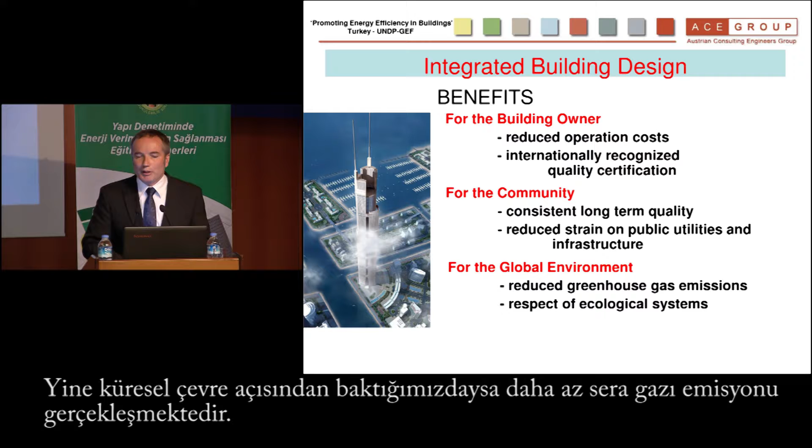The first thing we will talk about is integrated building design and the benefits of this procedure. The benefit for the building owner is reduced operating costs over the life cycle of the building. For the community, what's important is reduced strain on the utilities - if you have a neighborhood of energy efficient buildings, the utility doesn't need to be built up to the extent it would for a community with high energy demand. And naturally, the benefit for the global environment is reduced greenhouse gas emissions.

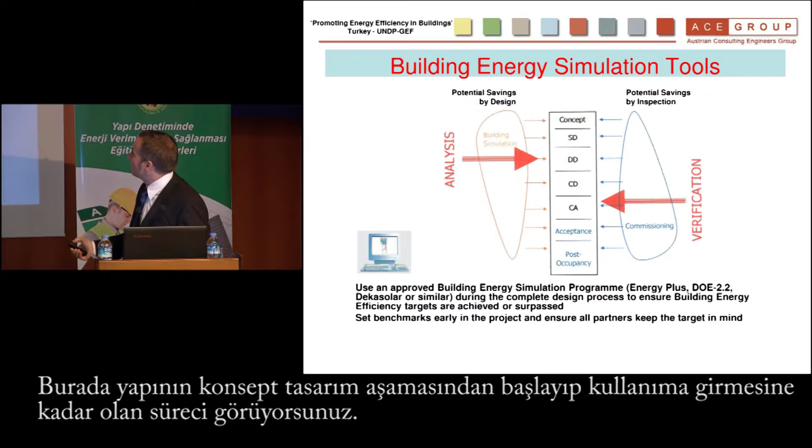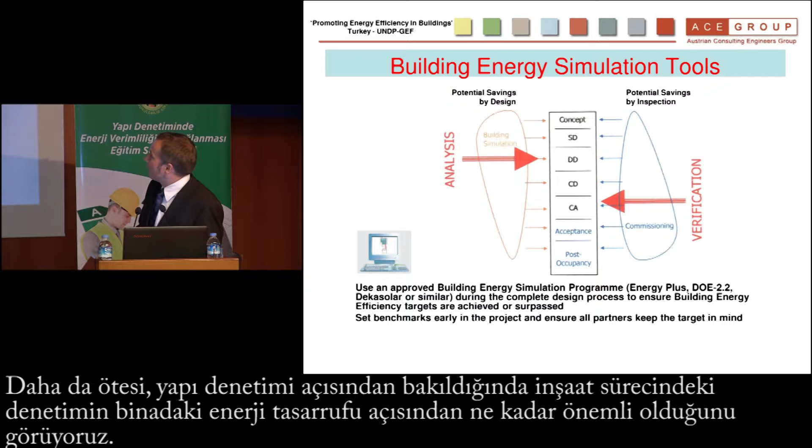We're going to talk about simulation tools in order to achieve the integrated building design. This is the design process from concept to occupancy. What's important to see is the great potential for energy efficiency savings in the early stages of building design, and further on, how important inspections are during the construction phase in terms of building up the potential energy savings. The important part here is integration - having all participants in the building process working together to achieve a target.

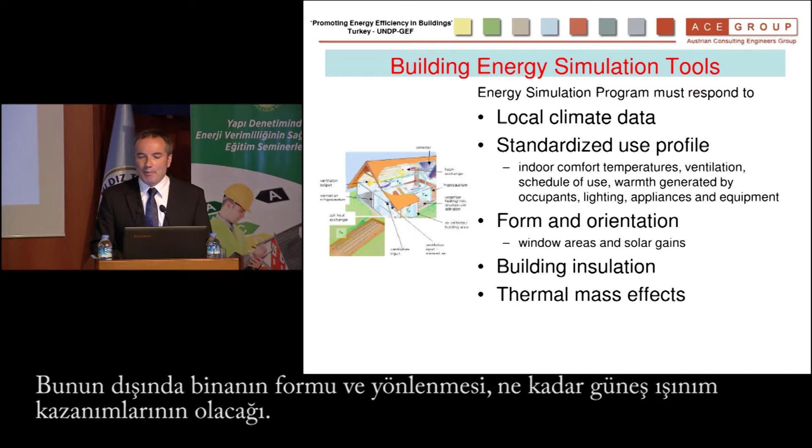Important for the simulation program is that it incorporates all the local climate data and a standardized use profile. For residential buildings, for example, the indoor comfort temperature is around 20 degrees, the amount of ventilation necessary, the schedule of use, the warmth generated by equipment and occupants - this all has to be taken into consideration. Also the form and orientation of the building, what solar radiation gains are expected, and the building insulation, but as important, the thermal mass effects - the storage of warmth or cooling in the building material inside the thermal insulation.

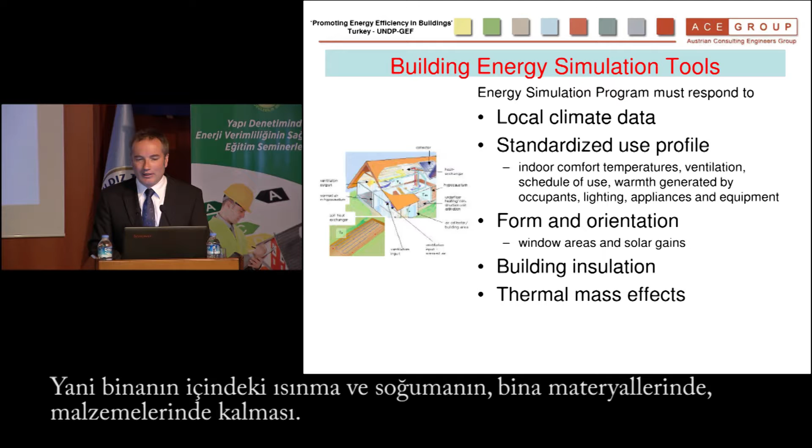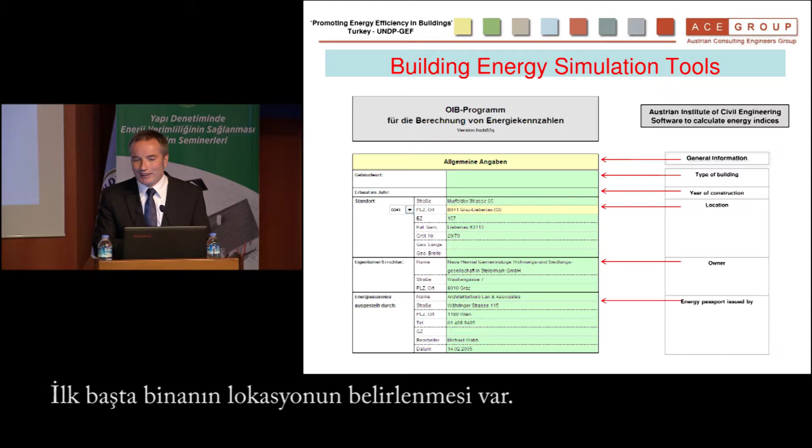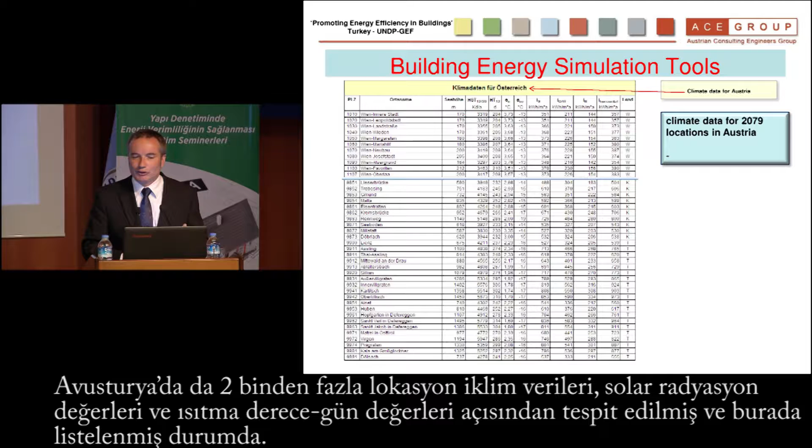I'm going to show you an example of the Austrian form for calculating the energy performance of buildings. This was developed by the Austrian Institute of Civil Engineering and made available free to all building professionals over the internet. Important on the cover is determining the location of the building - we've got over 2,000 locations in Austria documented in terms of climate data, solar radiation, and heating degree days.

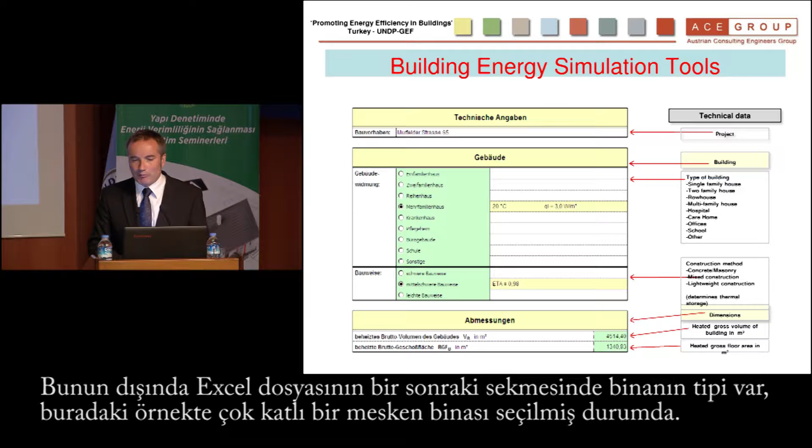This climate data feeds into the Excel program. On the next sheet, you talk about the type of building - in this particular case, we're looking at a multifamily residential building. Then we talk about the type of construction, whether it's light construction or whether the building materials are concrete and masonry, which can be used to build up the thermal mass of the building. At the bottom you see the brutto volume of the building, the heated volume of the building, and the heated floor area of the building.

This is the calculation for the heated volume and the heated floor area. What's important in the calculation is that each of the exterior surfaces of the building volume - basically this is the heated building volume of this particular project - and further on, each of these surfaces will be described in terms of the thermal quality of that exterior surface. So we talk about the building volume and the external envelope.

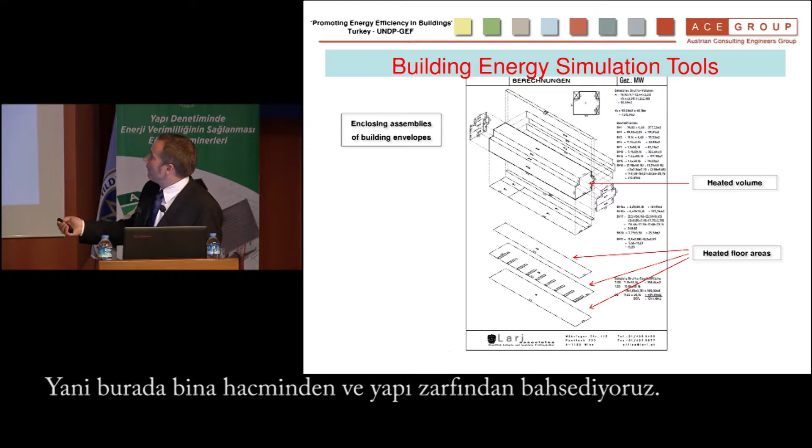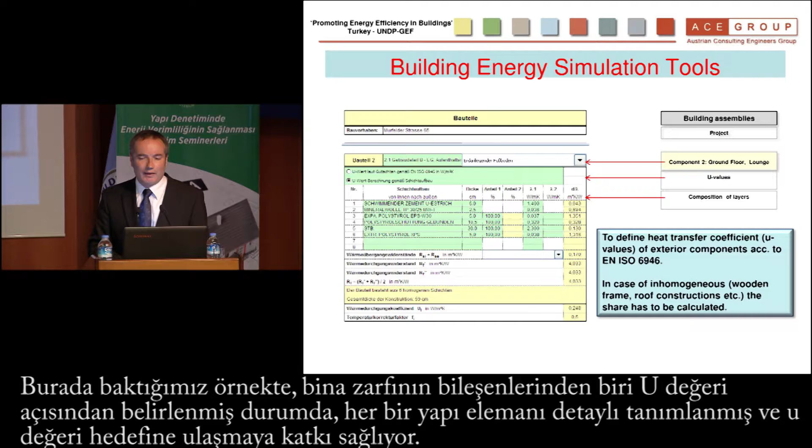Okay, in this particular case, we're describing the first one of the compositions of the building envelope in terms of the U value, and each element in the construction is described and contributes towards the U value. Then we talk about the area of each of these pieces of the building envelope, which will in the end describe the complete thermal envelope of the building.

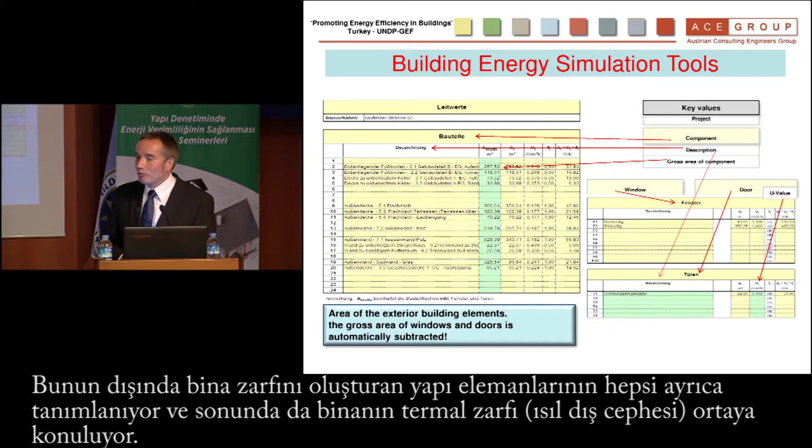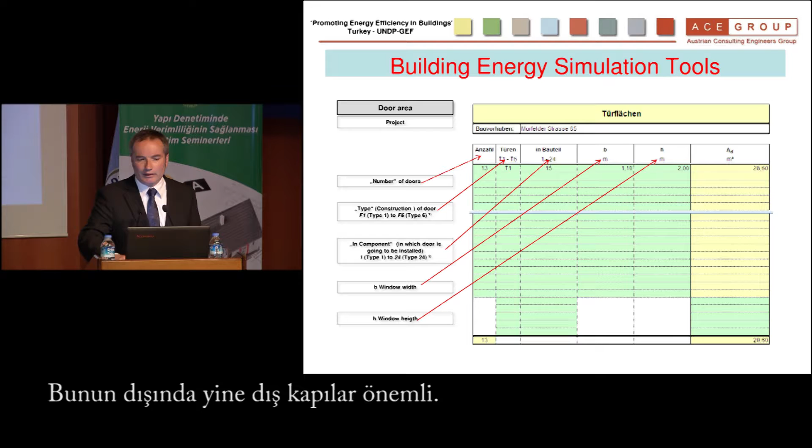We talk about the windows and the U values of the windows. You have the option here of either presenting a certificate for the complete window or describing the glazing, the frames, and the thermal bridge of the thermal frame. Then you describe the window areas, and what's important here is the size of the window, but also the orientation of the window, if it's facing south, and whether or not it has external shading devices attached to it. We have the same for exterior doors, basically the U value of exterior doors and sizes.

Okay, and then we talk about the thermal bridges. Basically, the form allows you to either calculate the thermal coefficient of the thermal bridges, or to take an assigned variable based on the European Commission documentation. The same is true of the ventilation, and here you're given the choice whether to describe manual ventilation or mechanical ventilation.

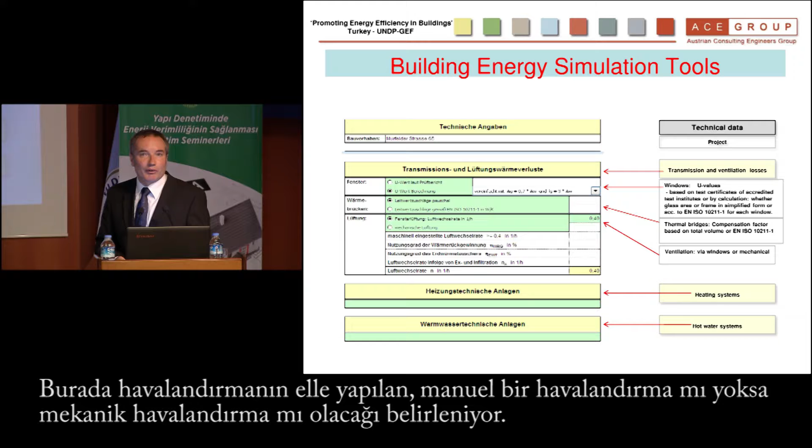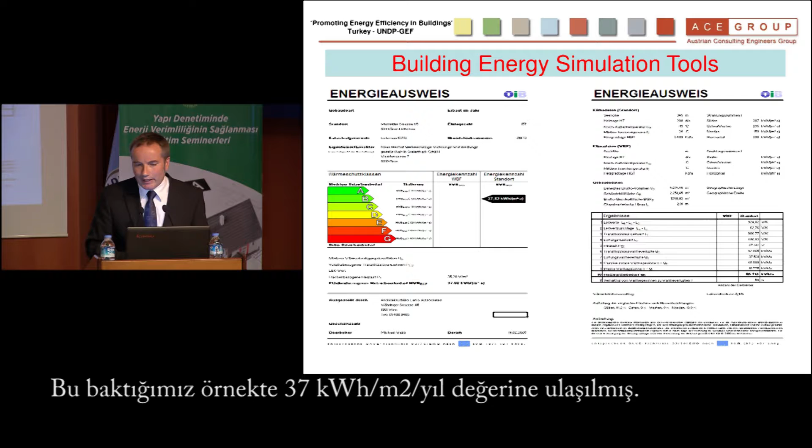Okay, and based on all of this information inputted into the program, you come up with the energy certificate of the building. In the case of Austria, it's concentrated on the heat, yearly heat necessity, the heat demand of the building. In this particular case, we've got 37 kilowatt hours per meter squared per year.

We use this program, as I say, this program was made available to all building consultants over the internet, and we use this program to experiment with the building form, with the building, with the composition of the building shell, and we can compare the effect of adding additional insulation, adding improved windows, and also with the ventilation.

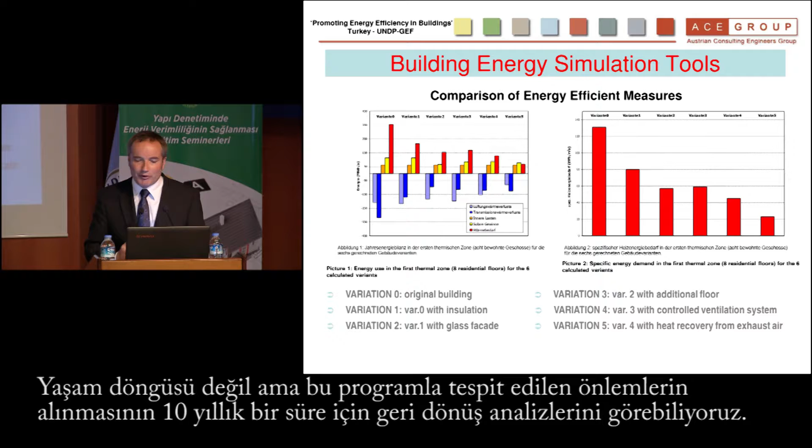And the idea is that you can determine the optimal energy efficiency measures using this program in order to have the most cost-effective building construction. That we're basically aiming at a 10-year payback period for the measures incorporated in the building.

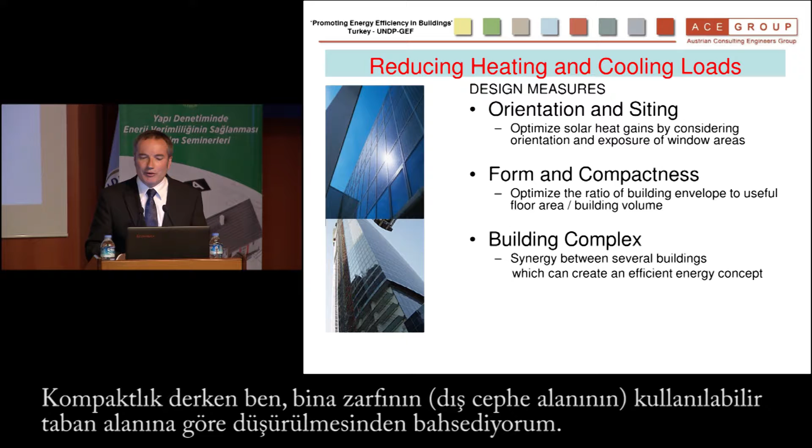Okay, and some of the concepts behind building energy efficiency buildings. Basically design measures that you can use at the beginning of the design process, choosing the proper orientation of siting and orientation of the building to optimize the solar gains, optimizing the form and compactness of the building. And by compactness, I mean that the ratio of building envelope is reduced in terms of comparison to the useful floor area of the building.

And finally, whether in a community you can place the buildings in such a manner with landscaping in order to create synergies between buildings and the landscape to reduce the energy demand of the building.

The other issues are creating inside the floor plan of the building comfort zones. That means creating heated and cooled zones within the building that are compact and have individual control. And again, in considering the design of the building, considering the location of these heated and cooled areas in terms of solar exposure, in order to reduce the heating and cooling load.

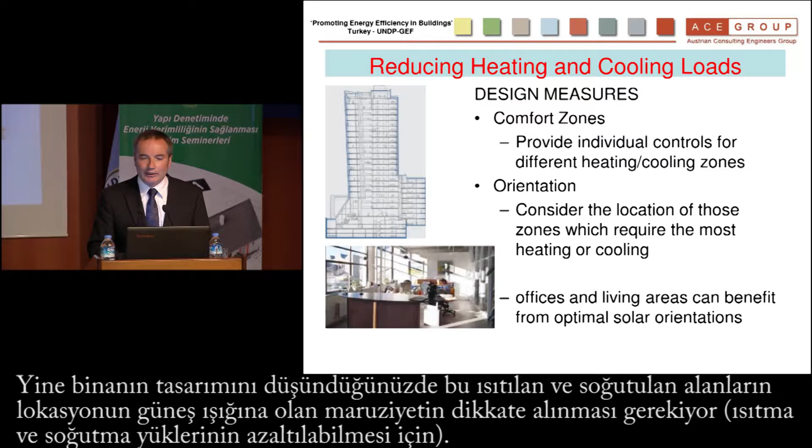And then coming back to the thermal mass of the building, considering that the building substance, the concrete, the masonry, inside the insulated layer can store heated and cooled air, heated and cooled temperatures, that you can store these up during the night, for example, and then they can be slowly released over the course of the day.

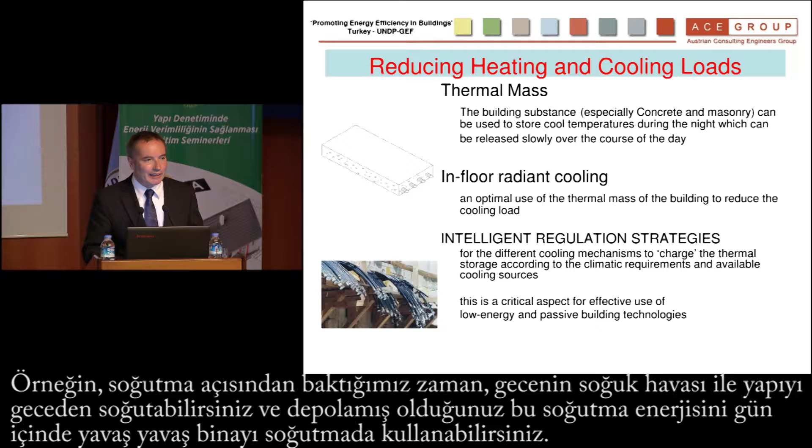In combination with this idea that you have intelligent regulation strategies, that means that you use, for example, cool air during the night in order to cool the structure of the building, that again can be released slowly over the course of the day.

Okay, again, one of the more effective means of saving energy is to use heat recovery. Basically, you need the ventilation for the building to create a healthy environment. And on top of that, from the expelled air we should extract either the cool or the heat in order to precondition the intake air.

And then the importance of inspection in the process again, that on-site inspections ensure the quality of the thermal insulation, that the building is airtight, that there are few thermal bridges or no thermal bridges, that the mechanical systems are constructed in accordance with the certification.

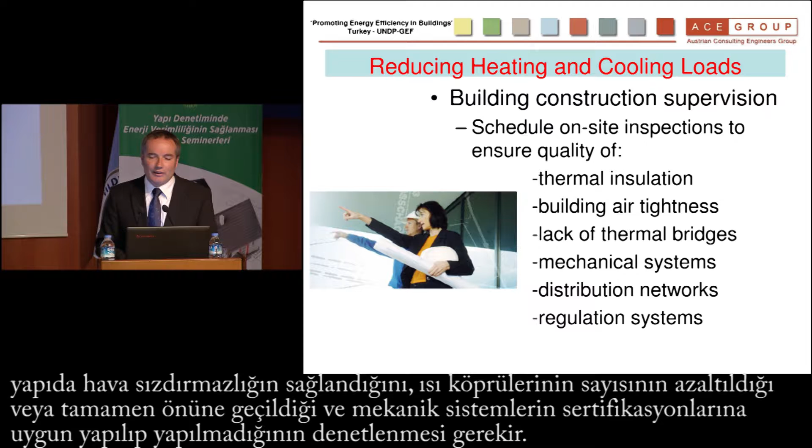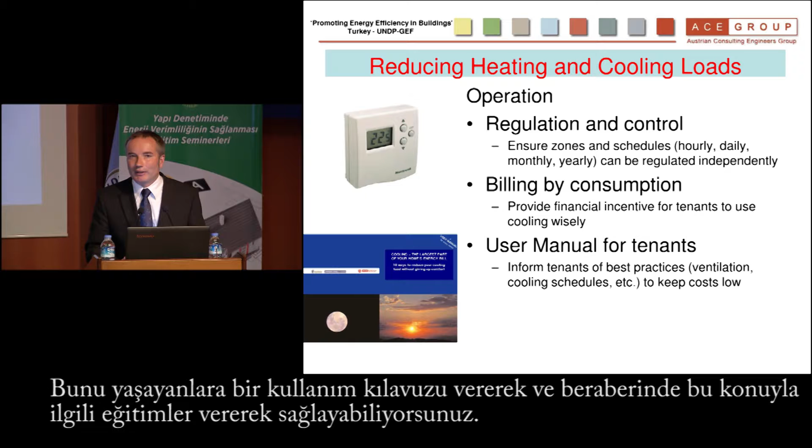During the operation, you have individual regulation and control within apartments and office spaces, so people can control the temperature. Combined with billing by consumption, tenants realize that excessive cooling in summer or excessive heating in winter impacts their heating bill. Another important aspect is informing tenants about how to use their building and best practices for energy efficiency, which we achieve through distributing user manuals and training for tenants.

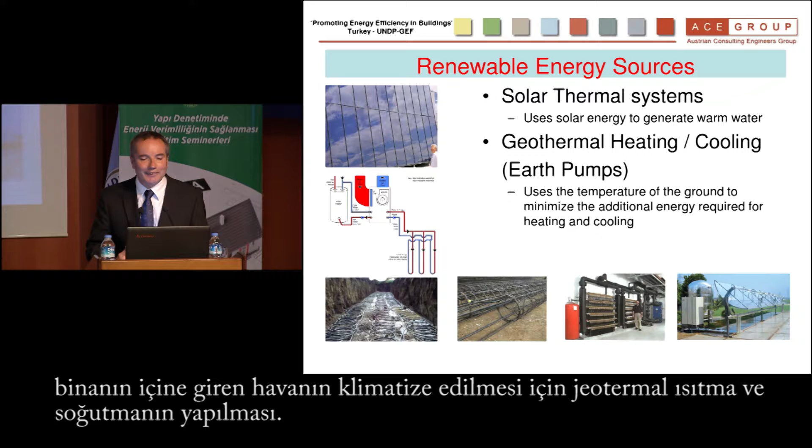Once the energy demand of the building is reduced, we can begin to look into the use of renewable energy sources to meet the demand. Some examples: using solar thermal systems to generate warm water and heating. Another popular system in Austria now is geothermal heating and cooling, using earth pumps to precondition the air coming into the building.

Other possibilities for electricity include using photovoltaic systems, with the possibility of integrating them into the architecture. In Vienna, there's a possibility that photovoltaic systems can feed back into the utility grid. You can use them independently or feed them back into the utility.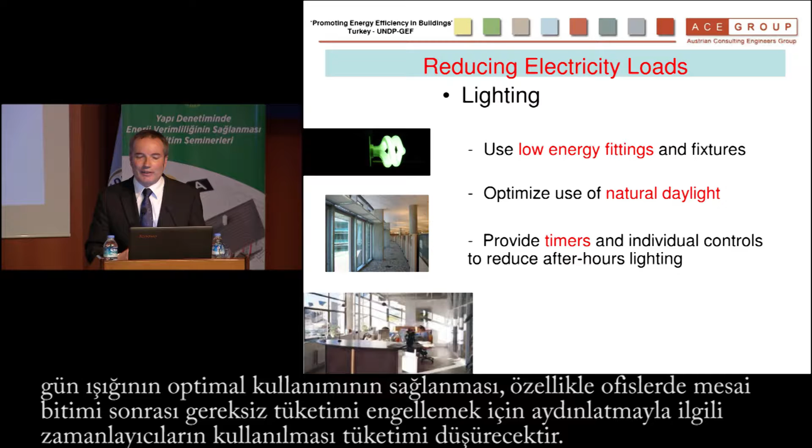Reducing the energy load also includes reducing electricity loads for the building, using energy efficient lighting and fixtures, optimizing the use of daylight inside the building, and using timers and individual controls to reduce after-hours lighting in offices and residential spaces.

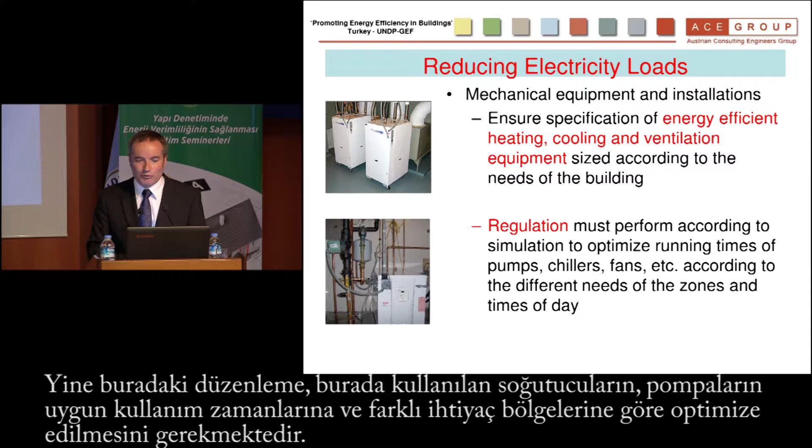The other important aspect is that if you have an energy efficient building shell, you can reduce the mechanical systems required for the building. And again, regulation, ensuring that heating and chillers are used according to the optimal times and needs of the zones, and choosing naturally energy efficient appliances inside the building.

The first consideration we spoke about this morning was using the local climate and considering it in the orientation of the building, especially considering solar exposure and how to prevent overheating in summer while using solar radiation in winter to help provide heating.

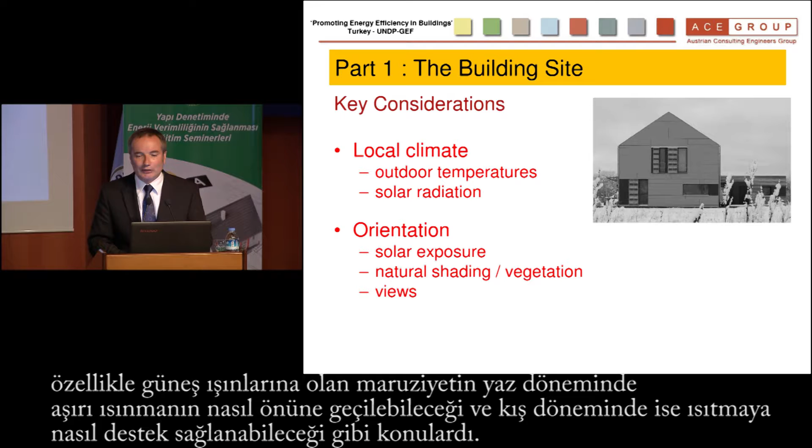We talk about the different climate zones in Europe. In the northern climate, you have high space heating demand and low solar radiation, especially during winter, so little opportunity to use solar radiation to heat the building. In Central Europe, where Austria is located, we have space heating demand especially during winter, little cooling demand, and enough solar radiation year-round to supplement heating with solar heat gains.

Finally, Southern Europe, where Istanbul is part of this, has high solar radiation year-round and needs cooling more than heating. This is the idea. This is an example of a building we built in Austria.

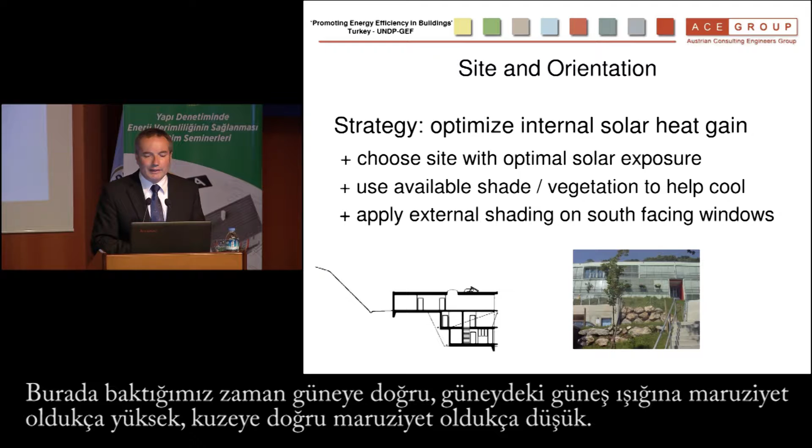Important to illustrate the siting of the building: it's a residential building built into the south-facing slope of a hill in Graz. This allows very much south exposure and a very reduced northern exposure for the building.

On the south side, as you can see in the photograph, we have full floor-to-ceiling glazing, but with an overhang on each floor of 60 centimeters to help shade the window area. You can see these lines here - this is the summer sun angle and this is the winter sun angle. So in summer, you don't have solar heat gains on the inside space; the window is kept in shadow. But in winter, solar radiation comes into the living space and helps heat the rooms.

Further, each of the windows in the apartments has the possibility of putting down blinds on the outside, solar blinds outside the window area. This further helps the occupants regulate the heat gain, especially during summer.

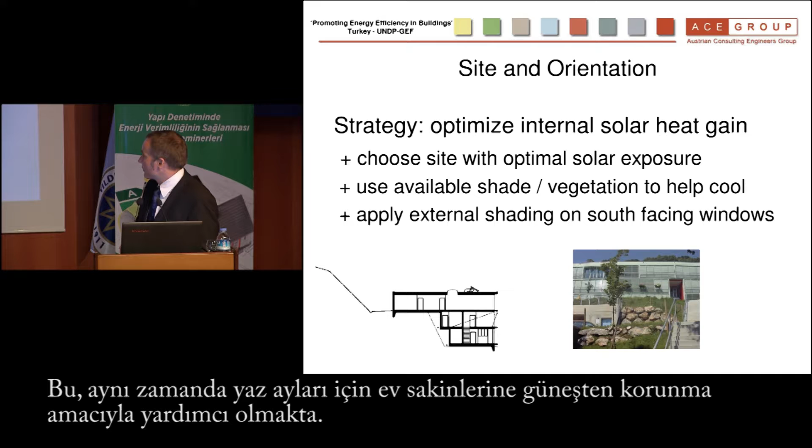A further concept is the depth of the building - a good illustration of the compact layout. We're looking at apartment units that are 18, 19 meters deep from south to north. We achieve this by having the important rooms that need lighting - the living room, the bedrooms - located on the outside, and the service core, bathrooms and kitchen, located on the inside where natural daylight isn't required.

Further, the living rooms where occupants spend their daytime hours are located towards the south side. These are the rooms which require the most conditioning, and the bedrooms are located on the back, north side. These can be cooler during the day.

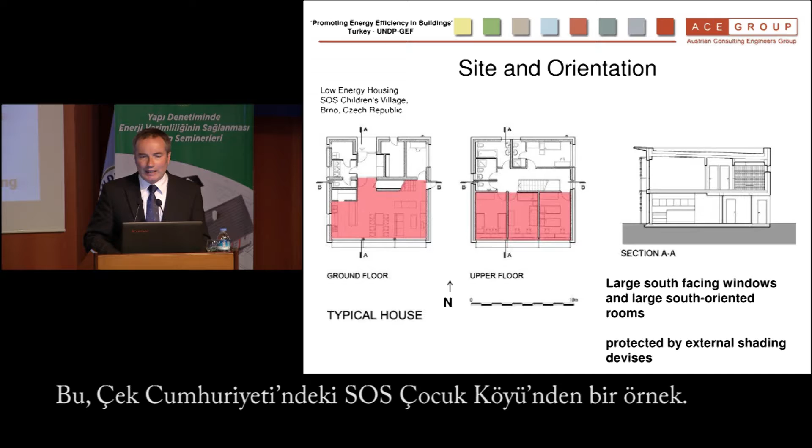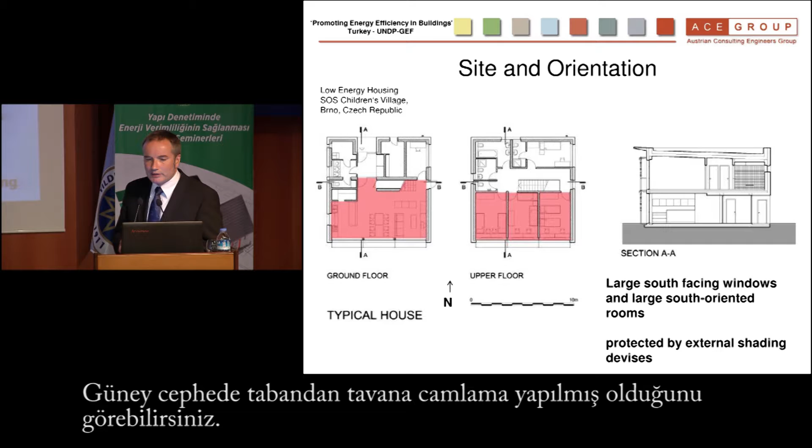This is a further example, the SOS Children's Village in the Czech Republic that we worked on. You can see on the south side we have floor-to-ceiling glazing. And on the north side we've put the service rooms, the bathrooms, the kitchen areas, the storage rooms.

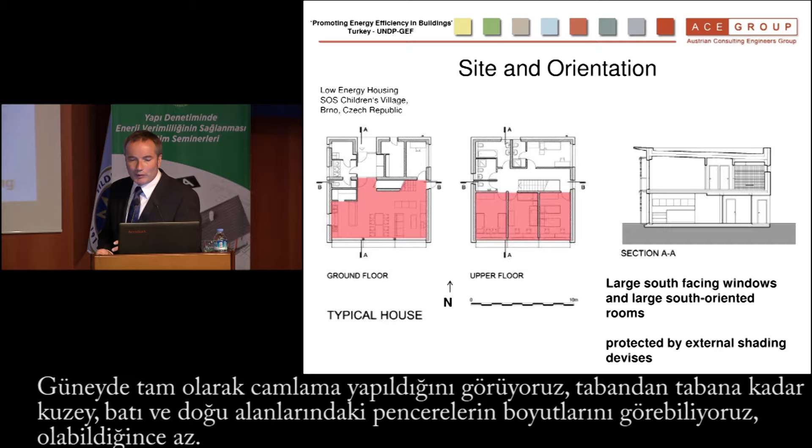And on the south side we have the main living room and bedrooms for the children. In the section you can see the floor-to-ceiling glazing on the south side, and on the north, east and west sides, as little window area as possible. We've provided this 60 centimeter balcony towards the south, and louvers to help provide shading, natural shading from the heat gains in the summer.

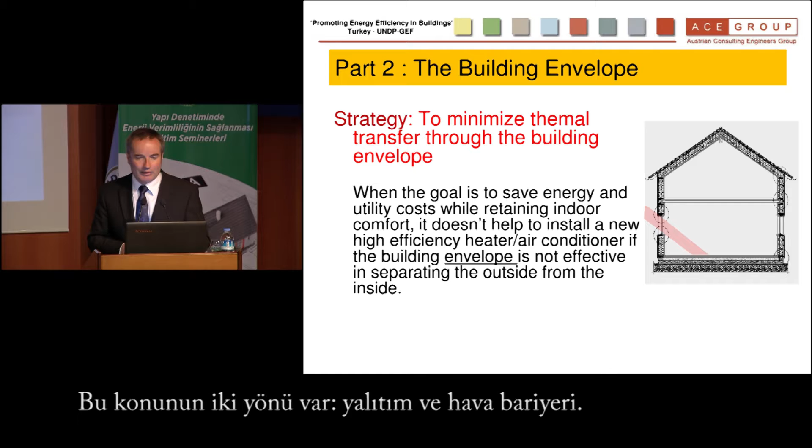Now I would like to speak about the building envelope. It has two aspects: the insulation and the air barrier. For the concept of the building, it's important to first attack the energy efficiency of the building before looking at the efficiency of the heating and air conditioning systems. It's important that the composition of the building itself is energy efficient before we begin applying energy efficient equipment. So in that respect, we talk about an efficient separation of the outdoor climate from the indoor climate.

That means no thermal movement and no air movement through the building shell. Again, the key considerations about optimizing the building shell: having a compact building form, trying to get the maximum usable floor area with the minimum of envelope.

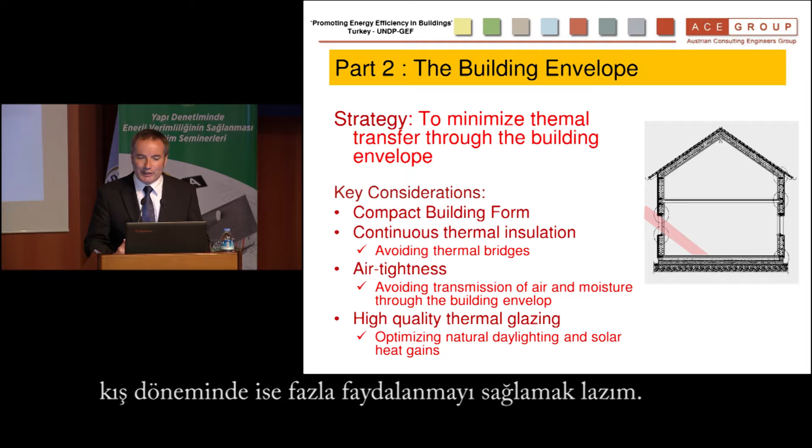In the building shell, ensure you have continuous thermal insulation and avoid any thermal barrier or thermal bridges across this insulation layer. It's important, especially in areas of high humidity, to have an airtight building envelope, avoiding the transmission of air and moisture through it. Finally, the quality of the windows is important, so you can optimize the amount of natural daylight, but at the same time restrict solar heat gains during the summer and use them during the winter.

Just an illustration again for the compact building form. The strategy is to reduce the amount of external building envelope while maximizing the amount of internal usable area.

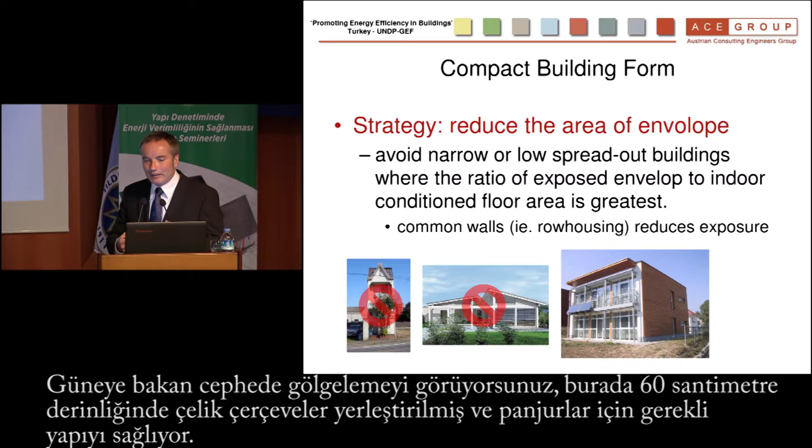The picture on the right shows the SOS Children's Village home. You can see the fully glazed south facade and the insulated and closed east facade. And further you can see on this building the south-facing shading construction. This steel frame is attached to the south facade, with a depth of 60 centimeters, providing the framework for the louvers.

This is what we're trying to avoid in terms of compact building form - too many projections and bays into the building form increase the amount of surface area of the envelope.

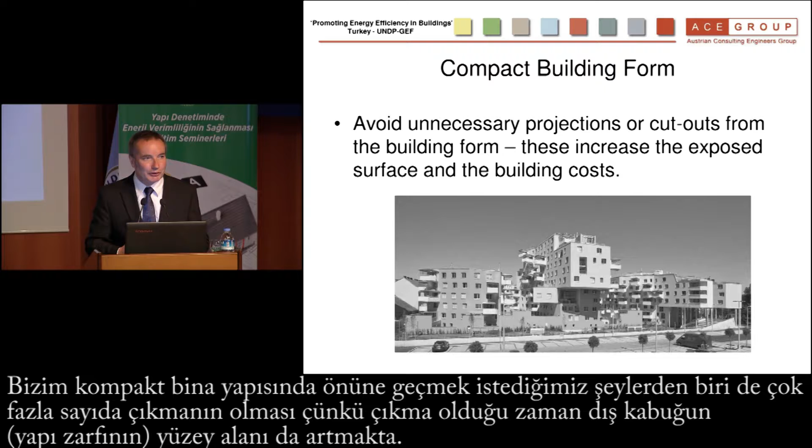This is another example of a building we did, a low energy housing project in Graz, Austria. Again, on the south elevation we have full glazing but with external shading. And on the north elevation we've reduced the amount of windows to a minimum. We've located the bedrooms, the kitchen, and washrooms to the north side.

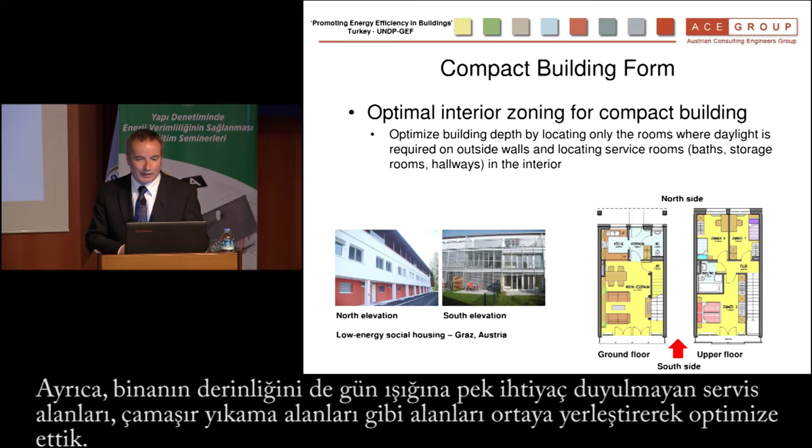And further, we've optimized the depth of the building by locating service rooms like the washroom on the inside, where no natural daylight is required.

Now we talk about the shell itself, having a continuous layer of thermal insulation around the heated volume. Again, this is the SOS Children's Village. In this particular case, we have 25 centimeter concrete clay block, and 20 centimeters of insulation on the outside. Important is the idea of building up a good thermal mass inside the insulation layer.

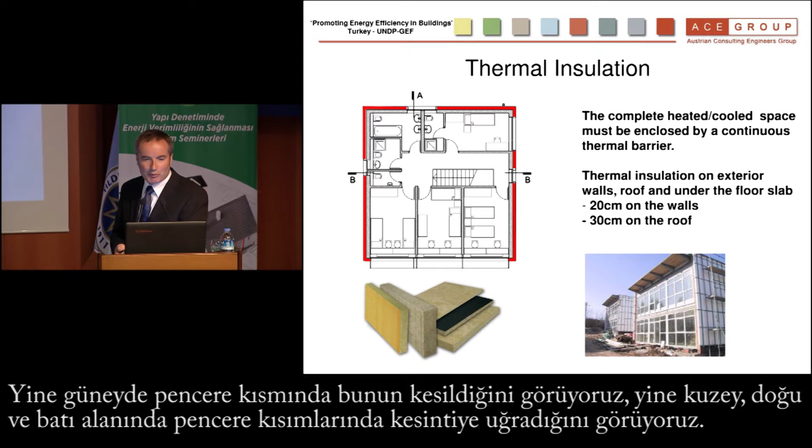You can see it in the floor plan - it's naturally broken for the floor-to-ceiling windows along the south facade and for the smaller windows along the north, east, and west elevations.

This is showing the application of 20 centimeter insulation blocks to the outside of the building. In this particular case, we're looking at the 20 centimeter blocks being adhered to the clay block.

You can also see that the windows are being constructed in such a way as to be integrated with the thermal insulation. You can see that they're actually outside the layer of block. They'll be finally integrated into the insulation layer.

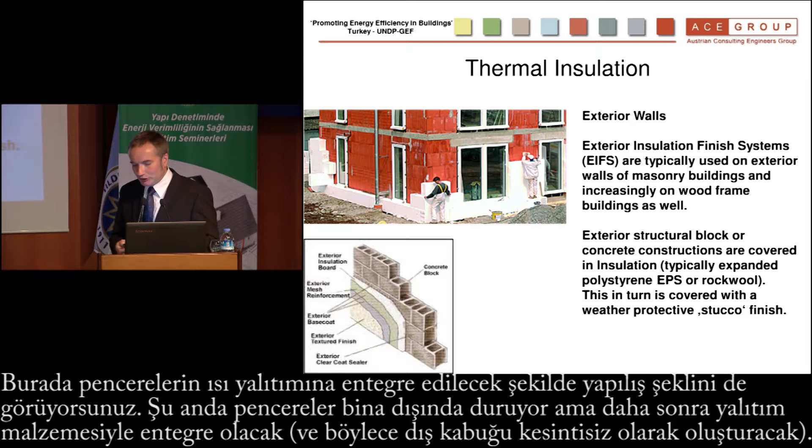Just an illustration of the outside wall. You can see the 20 centimeters insulation and the 25 centimeter clay block.

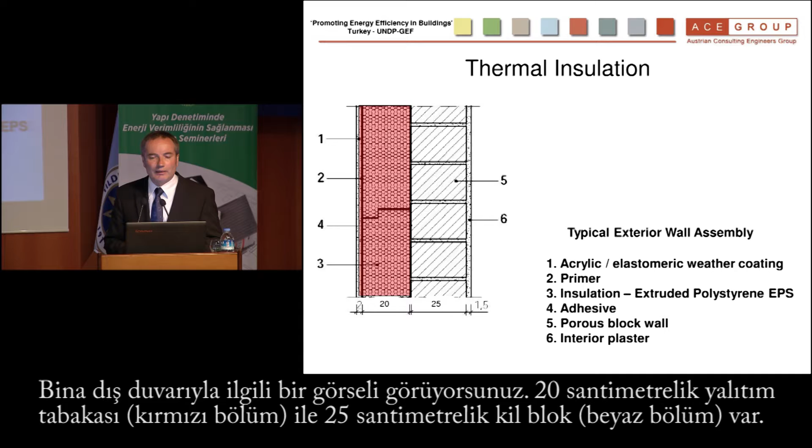Important at the details at the meeting of the roof and the wall, the meeting of the floor slab, and at the ground, as far as possible we try to get the insulation layer as continuous as possible. And that means preventing thermal bridges.

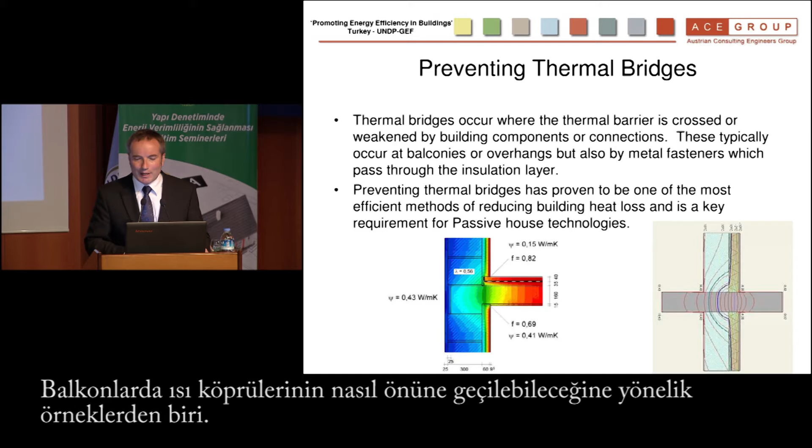These are places where, for example, the floor slab goes through the insulation layer, allowing heat transfer from inside to outside. So we have a few examples of how to avoid thermal bridges for balconies, for projecting balconies.

In this particular case, you can see the prefabricated insulation and reinforcing bar construction that is integral with the concrete floor slab. It's a compact insulation, and the reinforcing bars are integrated in the insulation and poured with the floor slab, so that the whole balcony construction becomes an integral but insulated structural component.

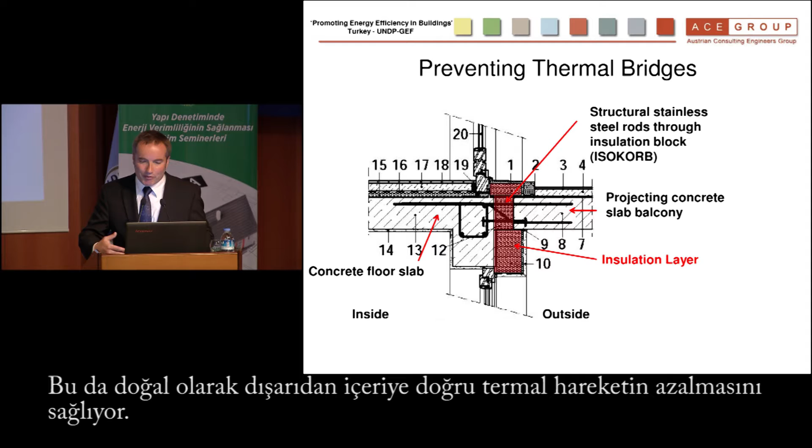And this naturally allows the reduction of thermal movement from the outside to the inside.

This is another example of a balcony construction. This was an existing building, and what we did is we had to apply an insulation layer on the outside of the building. So we've mounted steel brackets to the outside of the building and hung a steel balcony construction on these steel brackets.

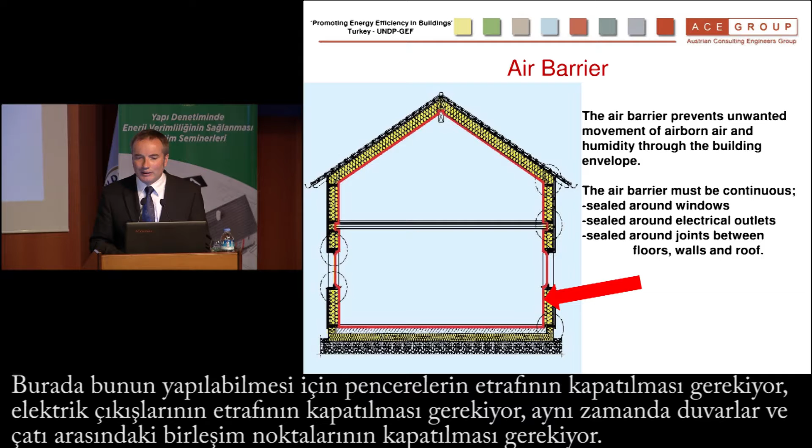Okay, the other issue is the air barrier, and this is very important, especially in humid climate, to prevent outside humid air from passing through the construction of the building and causing condensation inside the building shell. That means we have to ensure it's sealed around windows, around electrical outlets, and all the details where the roof and the floor slab meet.

Okay, and to test the thoroughness of the air barrier, they have a test for the passive house inspection called the blower door test. Basically they apply a positive and negative pressure to the building. They close all the windows and apply this testing component to the door.

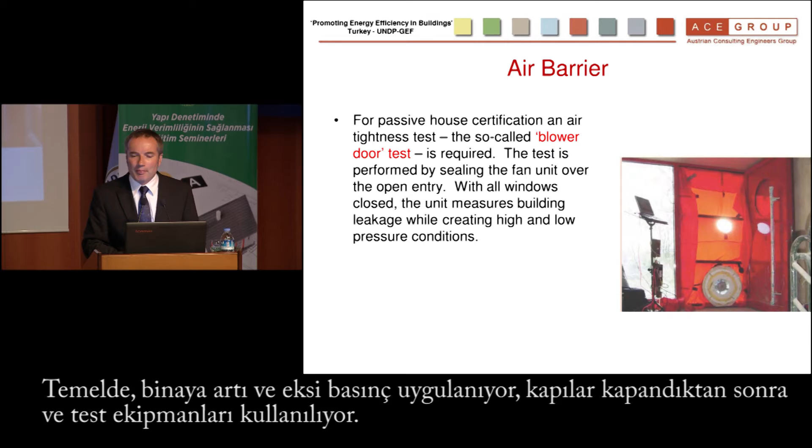Once you have the sealed building, naturally you still need to account for ventilation. This is done in the passive house standard through mechanical ventilation. The reason for that is it requires heat recovery. It requires, first of all, the level of ventilation, but secondly, that you can apply a heat recovery or cool air recovery system that takes the energy from the expelled air and applies it to the intake.

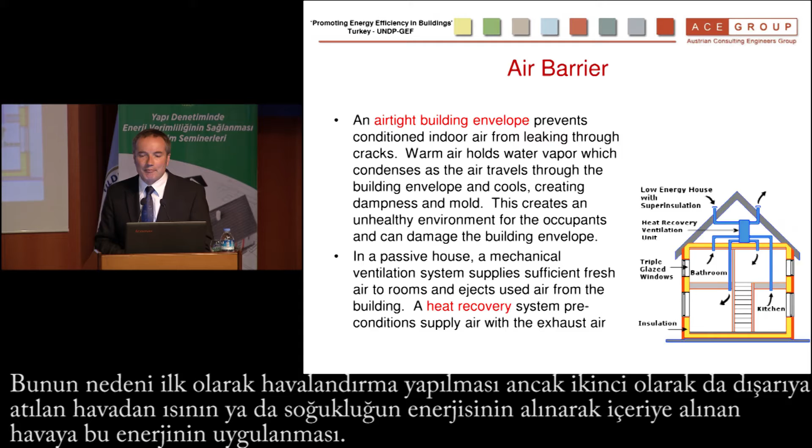And naturally, the windows play an important role in this. Typically, we're working with U values of 1.1. Passive house is around 0.85, looking at triple glazed and high efficiency windows.

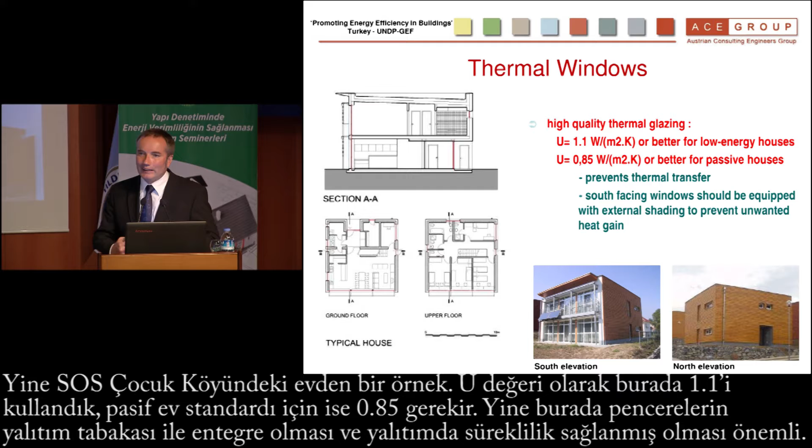Important here again, the windows themselves play an important role in continuing the insulation layer. Around the windows we have to ensure the lack of thermal bridges as well, and this is why we're overlapping the insulation layer over the insulated window frame by at least 3 centimeters in order to reduce the thermal bridge at the window frame.

In the earlier slide about the insulation, we saw how the window frames were actually outside of the block wall. This is a typical detail in passive house standard to further prevent the thermal bridge around the window frame.

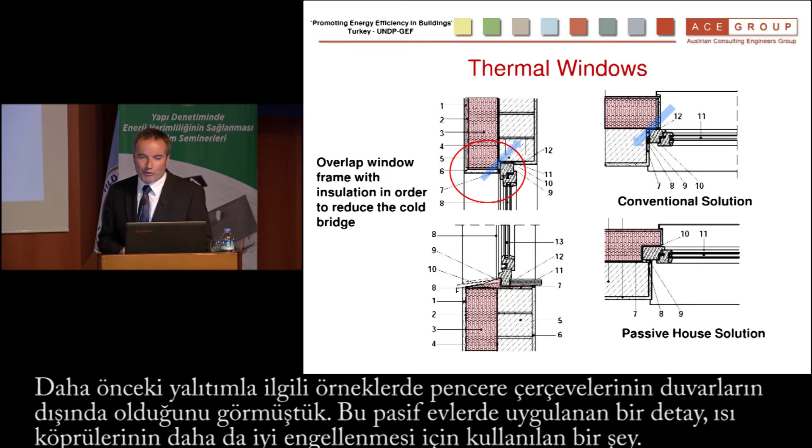Again, the strategy we try to employ is to reduce the energy consumption of the building as far as possible. In the case of passive house, we're looking at reducing it to as little as 15 kilowatt hour per meter squared per year. And then finally, for the rest, we can search for renewable energy sources to cover that demand, looking at possibilities to use solar radiation to help with heating and cooling, and photovoltaics to help generate electricity for the building.

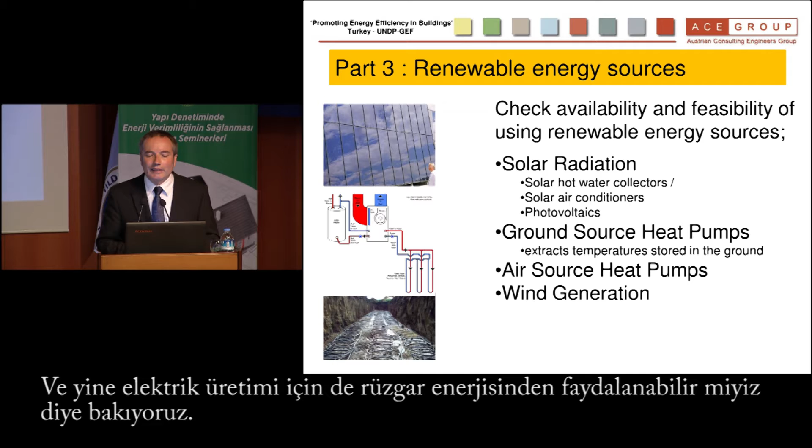For both heating and cooling, we use ground source heat pumps or air source heat pumps, and for electricity, any uses of wind generation. Finally, to supply backup systems, we look at sustainable sources of energy, using district heating and cooling, natural gas instead of coal, and electricity from renewable sources such as hydroelectric.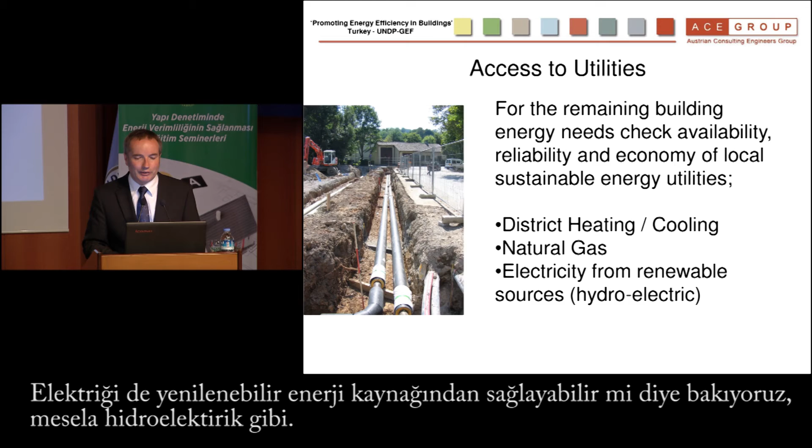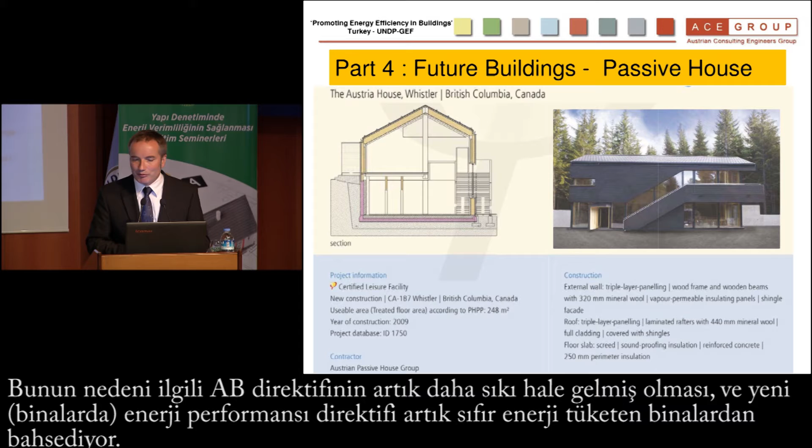The final part of the presentation, I'd like to talk about the passive house building standard and show a couple of examples. The European directive has been tightened, and the new Energy Performance Directive talks about net zero energy buildings. So when we talk about passive house, we're talking about a step in the direction of net zero energy buildings.

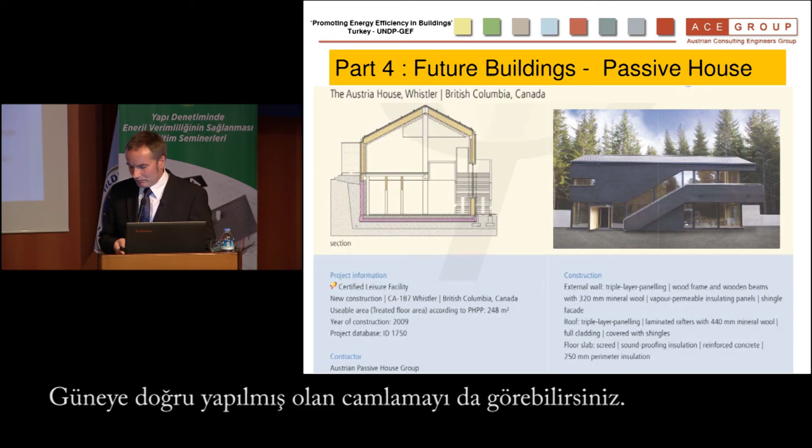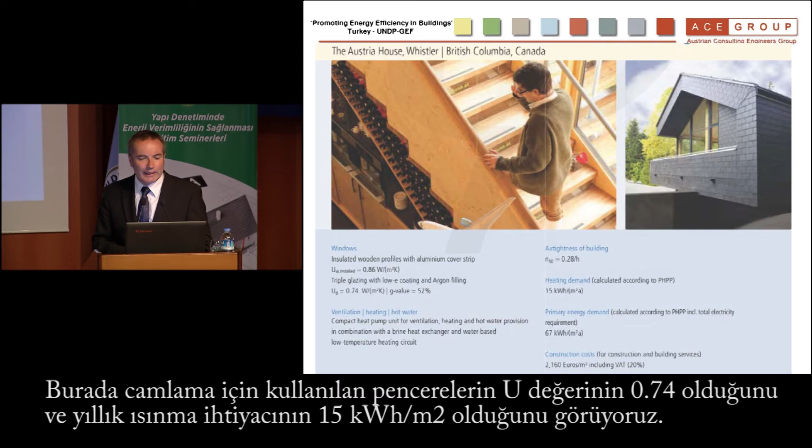This example is the Austria House, the Austria Pavilion for the 2010 Winter Olympics in Vancouver. In the section you can see the continuous insulation layer around the building, and the glazing directed towards the south. The windows have a U value of 0.74, and the heating demand for the building is 15 kilowatt hours per meter squared per year.

This is a second example of a passive house building, a student dormitory in Vienna. In this case, the amount of window has been reduced considerably, and each of the rooms has the possibility of closing.

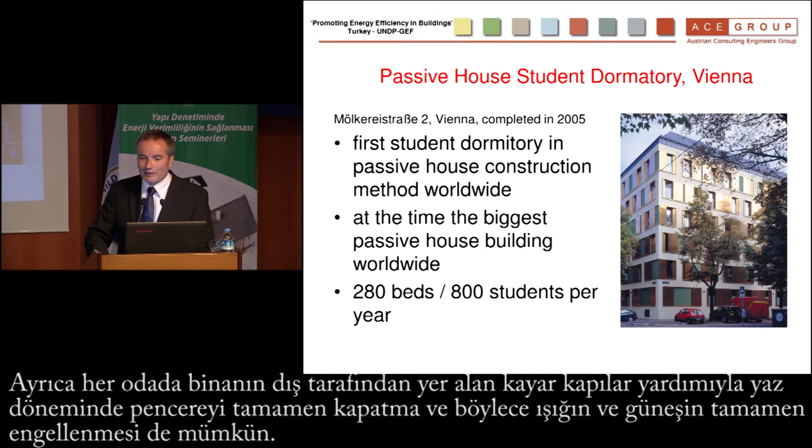They have a sliding door located on the outside of the building so they can shut the window completely during the summer. The building has a depth of about 18 meters, achieved again by putting the service rooms on the interior of the building.

They've achieved this by putting the service rooms, kitchens, and bathrooms on the interior of the building, and further, they've put light wells through the building to help light the interior spaces.

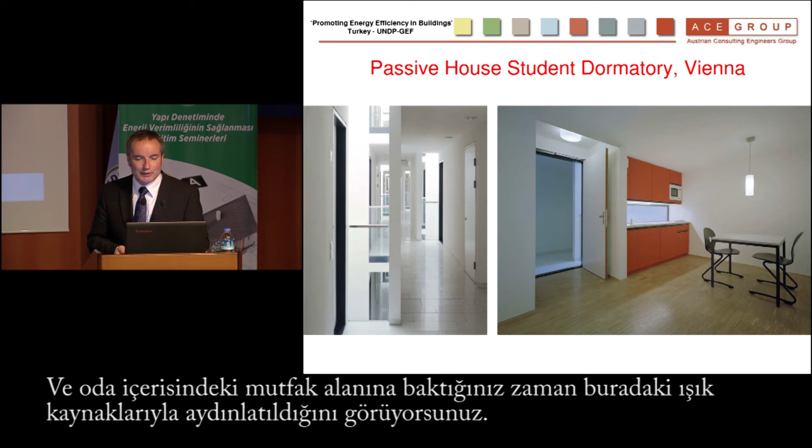On the slide on the left you can see the light well moving through the corridor area, and the kitchen area inside the unit is basically supplied by the light from this light well.

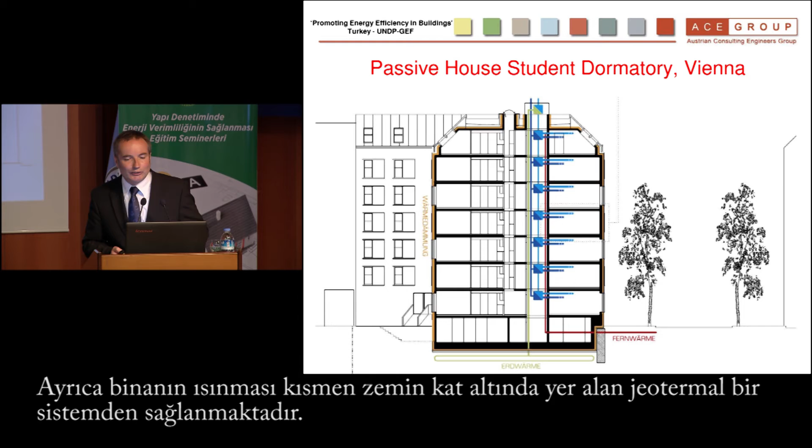Here's a section through the building. Again you can see the continuous insulation layer around the building, and the natural daylighting through light wells. Further, the building energy system is partially supplied by a geothermal system located under the floor slab, and a heat recovery system located on the roof.

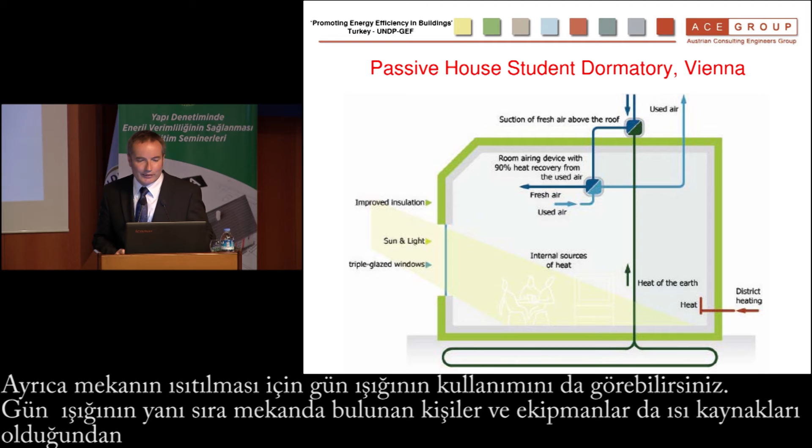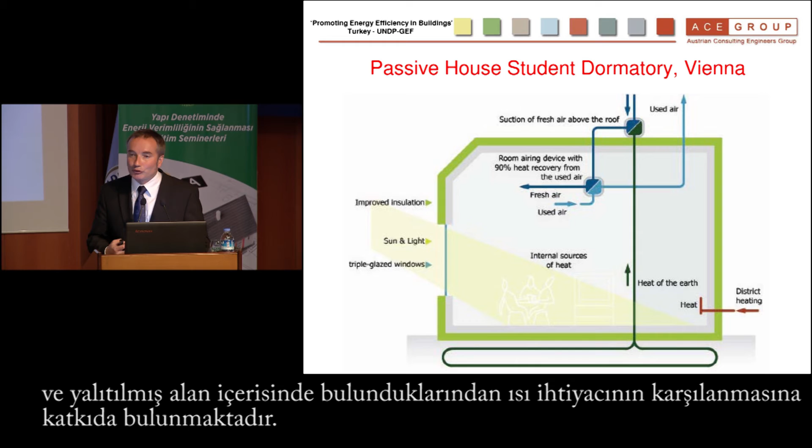Further, the use of natural daylight helps heat the space. Not only the natural daylight, but also the occupants themselves and the equipment enclosed in the space are heat sources inside the insulated layer that contribute to the heat demand of the building.

This is an illustration of the heat energy being supplied to the building. In the first column we have the transmission losses through the building envelope, and in the second column the ventilation losses through the ventilation system. Compensating for that partially are the solar heat gains and the internal heat gains.

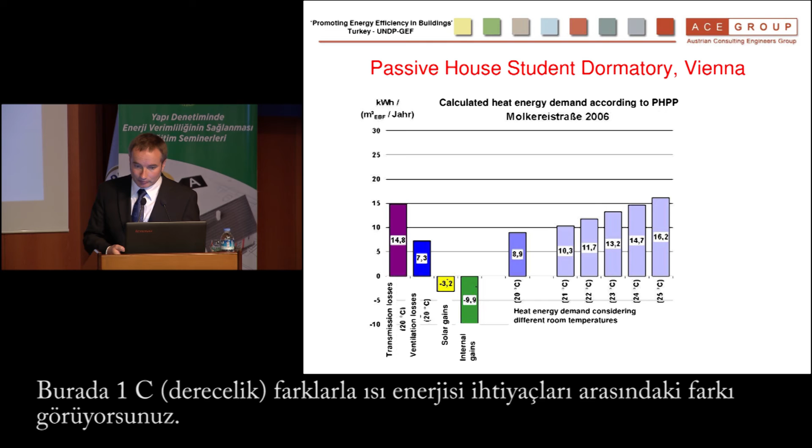By internal heat gains, we're talking about heat generated by the occupants themselves and by the equipment in the space. Then we look at the additional heat required after these solar and internal gains, considering different room temperatures. You can see the difference in heat energy demand based on increments of 1 degree additional internal temperature required.

What we've been able to achieve with the Passive House student dormitory are savings of about 80% compared to conventional buildings. The building itself required about 6% higher construction cost, and we talk about a payback period of about 10 years to compensate.

The inspections, not only the design but also the inspections for Passive House, are much stricter than for standard housing construction.